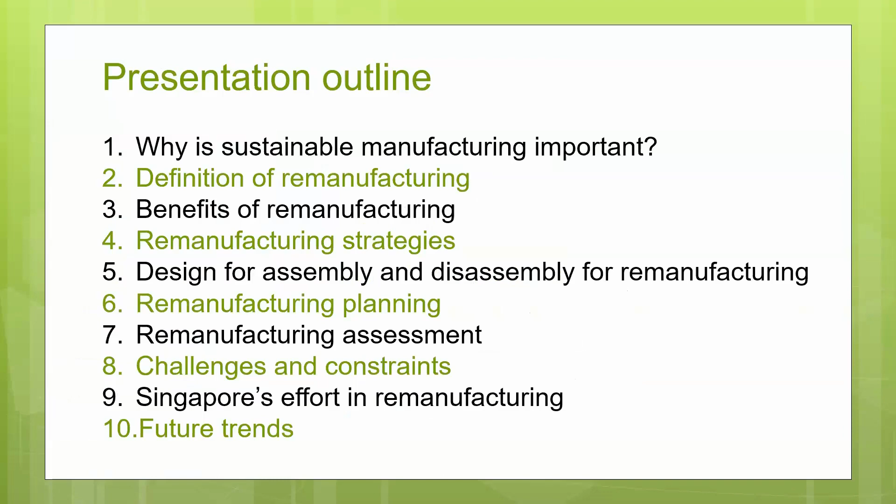A very quick definition: sustainable manufacturing and sustainable development is the development which meets the needs of current generations without compromising the ability of future generations to meet their own needs. But this is actually a very general definition. Everybody uses this. What it means is whatever we are doing now should not affect future generations.

We are producing a lot of discharge into the sea, discharge into the air, and so on. So whatever good production environment we are enjoying now, it does not mean that in future the same can be promised.

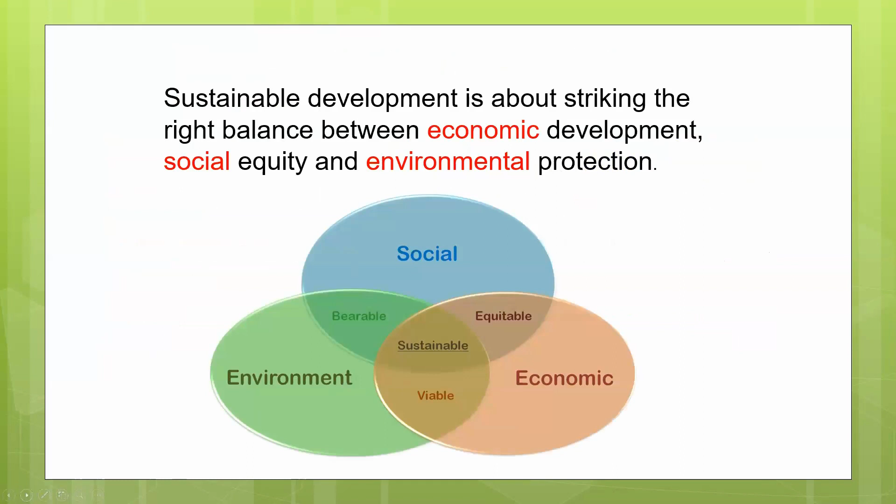I think this is again a very well understood diagram. It's a balance of three elements: social, economic, and environment. So this is a balance of all three, and if we can meet all of them, it will be a very good situation. These three elements, social, economic, and environment, are the three pillars, what we call the triple bottom line.

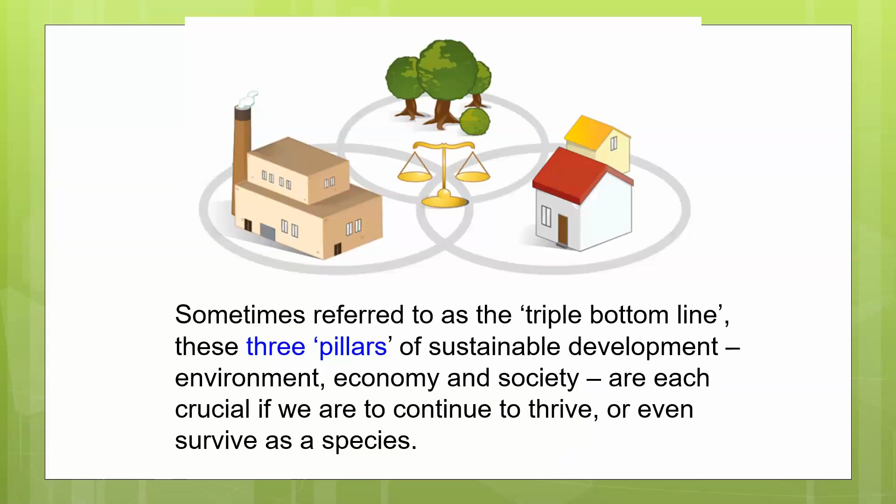I go through this very quickly, because we know the reason is water is a problem, and renewable energy is a problem. Now everybody is switching into wind, solar, and so on.

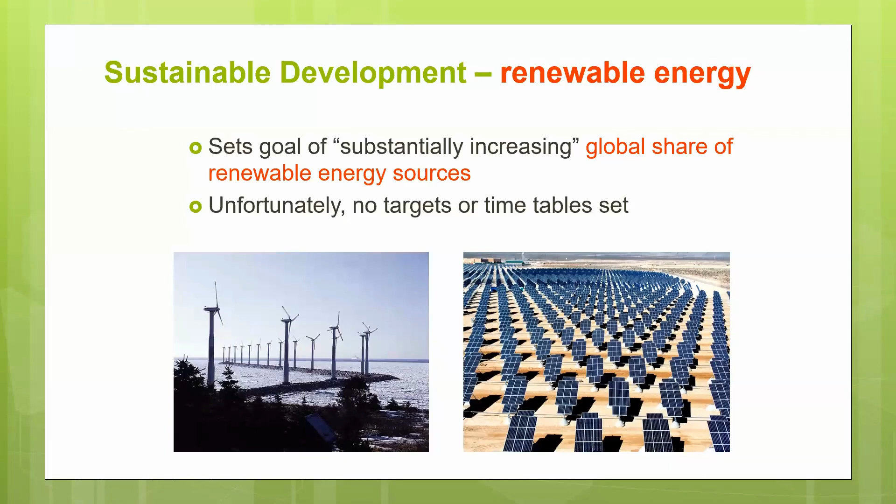In fact, I tell you honestly, the best energy is actually nuclear. Nuclear energy is the best, highly efficient, very clean, but safety is an issue. And of course we know that safety can actually be controlled. Now, the Fukushima accident actually is not due to the fault of the nuclear plant, but due to the earthquake, and the earthquake has resulted in the meltdown of the nuclear reactor.

And the Earth's resources are limited. And then we said that the world population is going higher and higher. We already heard the news: China used to lead the world's population, it has been overtaken by India.

I was even jokingly telling my friend, that's the only thing India can overtake China. I don't know about the rest, population wise. Yes they do, I'm not sure if I'm offending anybody here or not, you know, but that is a fact.

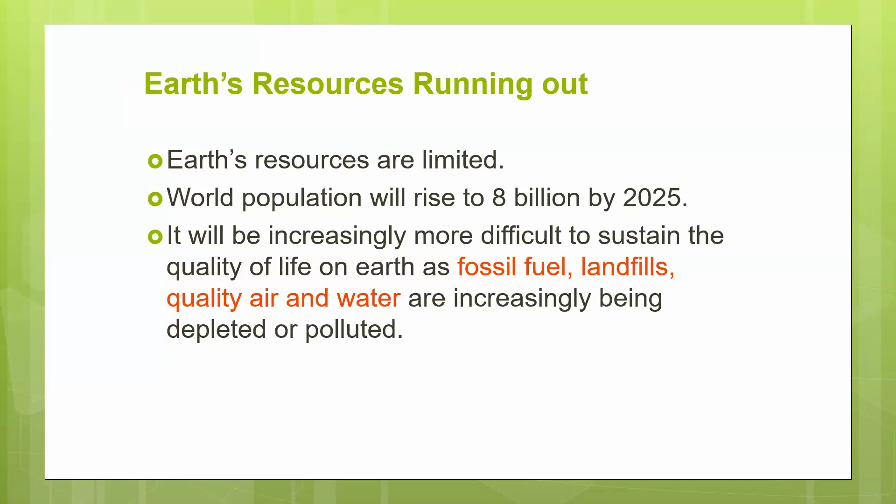You'll be surprised to see mountains of mobile phones. Now mobile phones, every few months you have a new model, so people just chuck it out and didn't think of trying to recycle the mobile phone, okay?

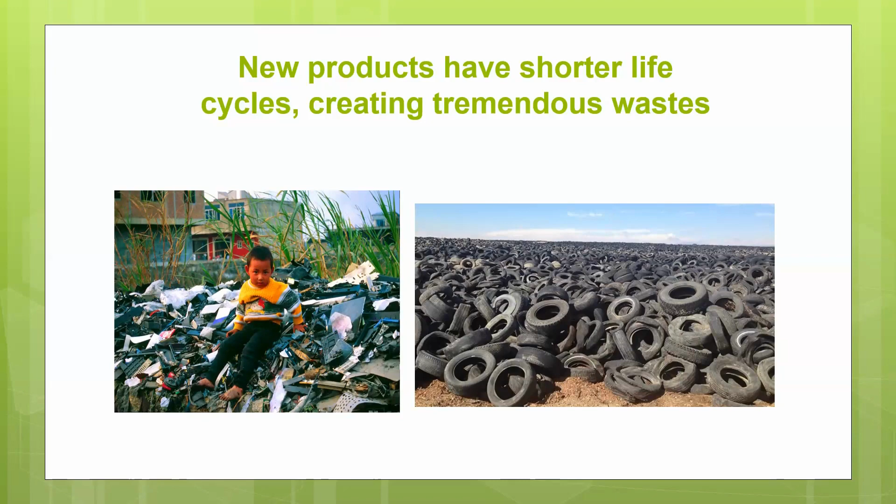And then other ways of treating it is, for example, you can landfill. But landfill, after a while, you run out of space. And landfill is not simply dumping waste into the earth or digging a hole. You have to have a lot of preparation to make sure that the leachate and so on are being properly collected, okay?

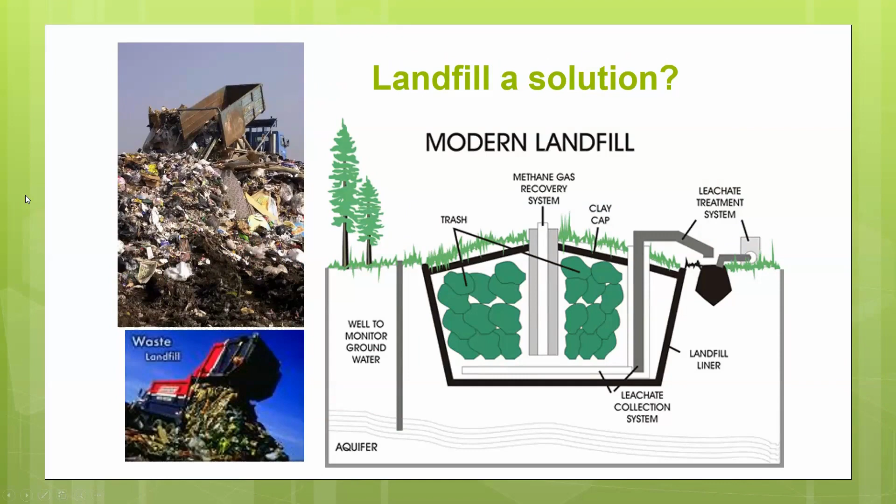And then increasing legislation, we have more legislation every day. So what is the viable solution? This one we all know: reduce the use of raw material. Reduce, this is called making it lighter yet just as strong, and that means you have to use a different kind of material, but the cost needs to be balanced.

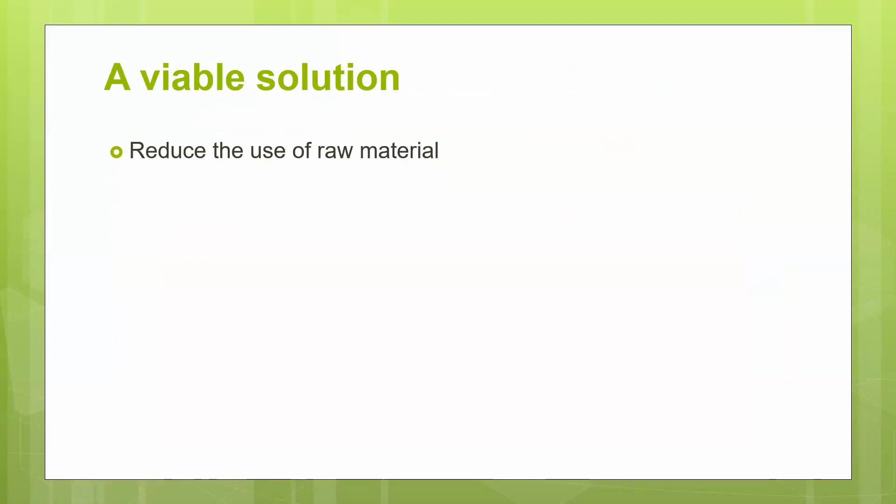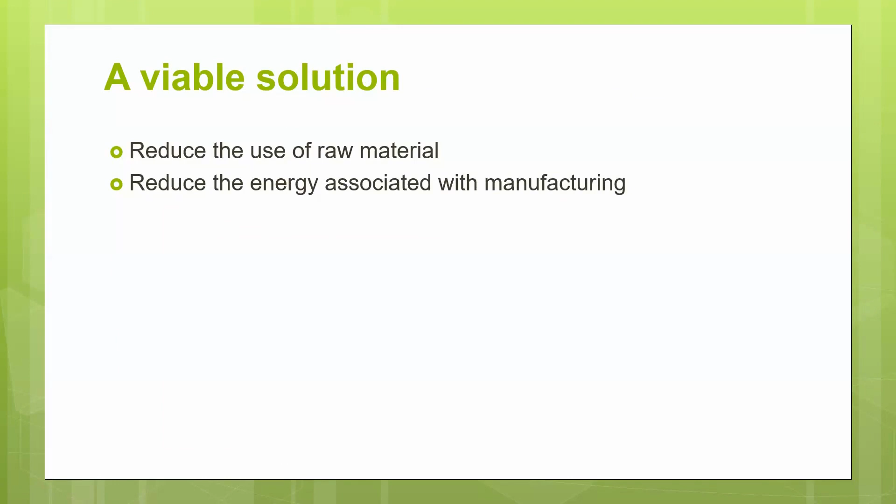Reduce the energy associated with manufacturing. We try to use a material that consumes a lower energy level, and is also easier to fabricate. Reduce pollution, reduce recycling. But my talk for this morning is not about those topics, because everybody knows these topics.

What I really want to talk about is remanufacturing. Now, remanufacturing, people get confused with a few terms like refurbishment, repair, demanufacturing. Now they are different things altogether.

Demanufacturing is actually you disassemble the complete thing and then try to recycle the materials and so on. That's demanufacturing. So at the end of the demanufacturing, you will not have a workable product.

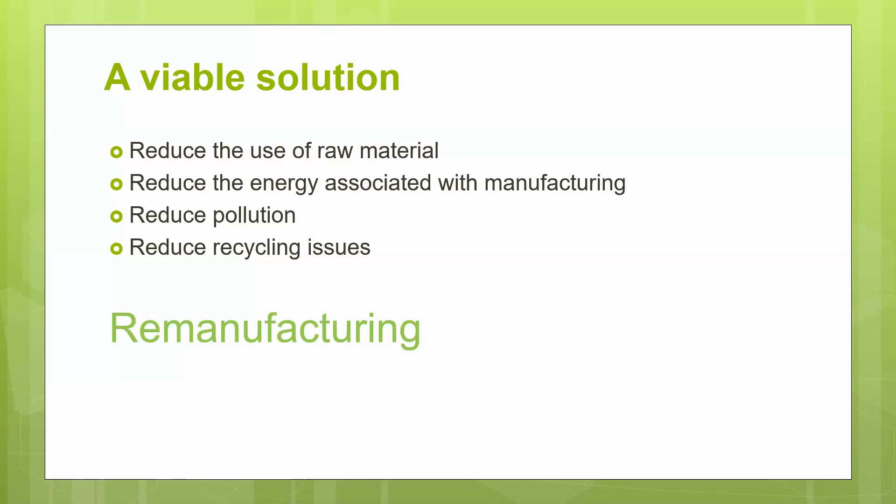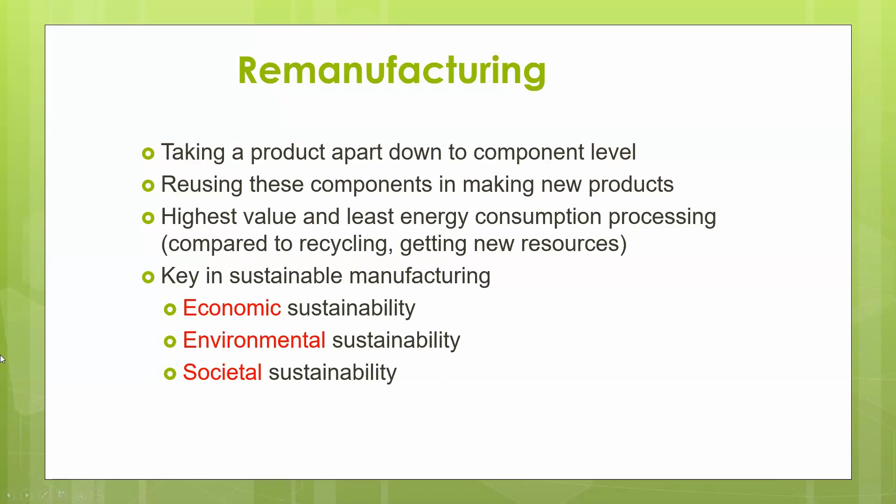But remanufacturing is you try to salvage the core component, we call it a core, and then you recondition it to bring it to the same working condition as before, and the product becomes a usable product. Remanufacturing is to take a part down to the component level, and then reuse the components, making new products. The highest value, least energy consumption processes are being considered, and this actually contributes to economic, environment, and also social sustainability.

Now, some of those parts that can be salvaged, these are what we call the cores. Core represents the most important part of a product, right? So if you can reinstate the condition of these cores and put it back again, you can actually reuse the entire thing. But the process is actually quite complicated. It consists of inspection, disassembly, part replacement, refurbishment, cleaning, and so on and so forth.

Now, very often people will ask, who would use a remanufactured product? Well, you'll be surprised, because if a remanufactured product is as good, almost as good as a new product, and you pay 30–40% less money, of course people want to use it. But there are a lot of pre-qualifiers. One is that the product must have a very long stable life, meaning it should still be in the market for the next 10–15 years. And also the product must have a pretty good high value to begin with.

Now, you don't remanufacture a calculator, or a watch, but cars, tractors, aircrafts, ships, and also military equipment. Military equipment actually is a very good candidate for remanufacturing, especially when a country is not preparing for war. They only use the equipment for practice, for training, and so on.

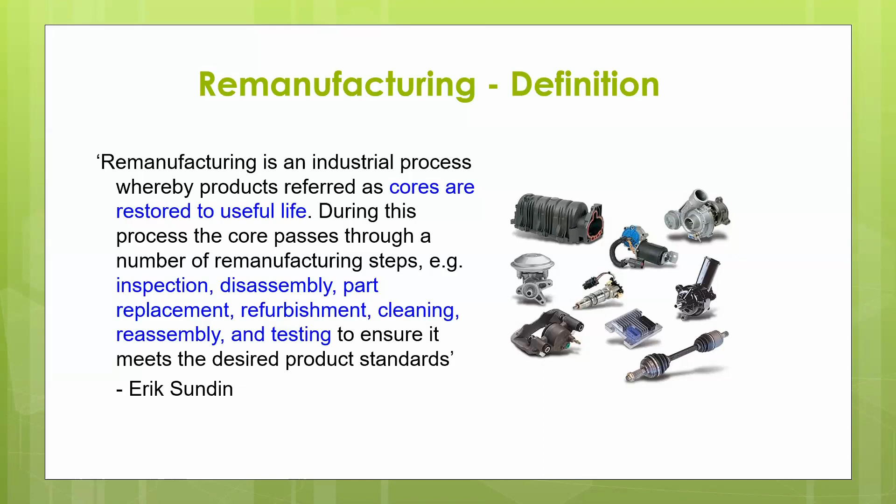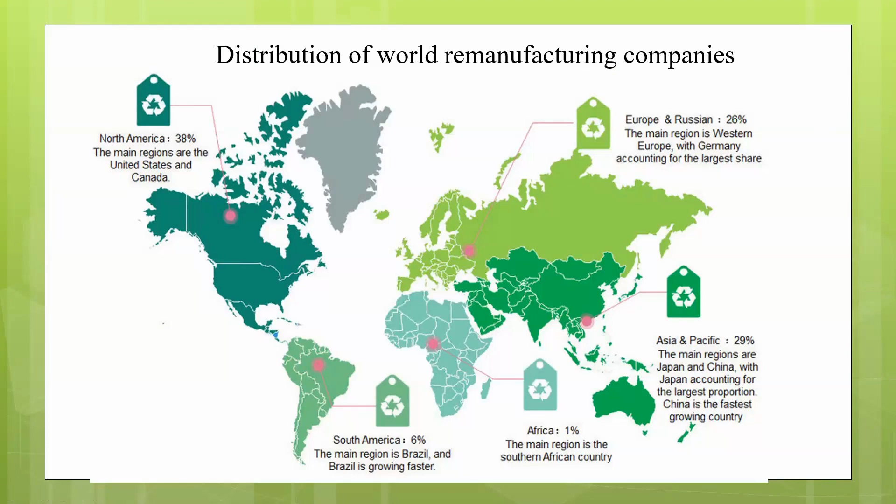So there are actually many countries that have practiced remanufacturing. For example, in Japan, this is sometime back, because nowadays nobody uses single-use cameras anymore — that's the film stage, right? But photocopiers, they remanufacture. In China, there's automotive remanufacturing, and Caterpillar's Earth Mover, Cummins, Volkswagen all established remanufacturing. In Singapore, we look at aircraft engine overhaul, crane, Caterpillar remanufacturing facilities, and so on.

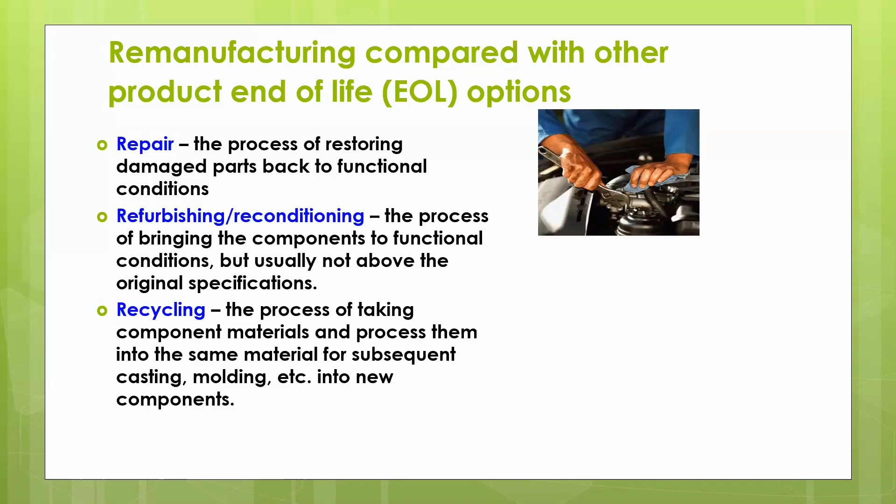Now, there are a few categories here. One is called repair. Repair is the process of restoring damaged parts back to functional condition. That's actually not remanufacturing, that's repair — when your car is not working, something's gone, you send the car in to repair, and the garage man puts it to work again. Refurbishing and reconditioning, again, this is not exactly remanufacturing. And recycle is the worst, because recycle essentially you strip and scrap the metal and then recycle the material, okay?

Now, for remanufactured products, you actually receive a warranty — could be 6 months, could be 1 year, and so on. And remanufactured products actually have very high levels of quality and performance, right? They may lose their identity — some parts that cannot be remanufactured are replaced with new components. But interestingly, a remanufactured product can outperform the original version.

Original version meaning the product that was produced, let's say, 10 years ago, and now you remanufacture it, it's actually better than the product 10 years ago. The reason is simple: it has been replaced by better components, better controls, and so on. But of course, it's probably not comparable to a brand new product made now, which has even more functions, electronic controls, etc. But then, of course, you pay much less. Whether you need a 100% functional product or you're happy with an 80%, 90%, 70% functional product, and yet pay a much higher discount for it, okay?

For example, like a vacuum cleaner — I wouldn't buy a Dyson vacuum cleaner. I mean, it's efficient, no doubt, but it's crazily expensive. I would buy a vacuum cleaner which is much cheaper, and at the most, I sweep my floor a few more times, right? Dyson can do it in 1 time, I can do it in 3 times. But the thing is, would you pay for a remanufactured Dyson vacuum cleaner at 50% of the price? Some people may consider that.

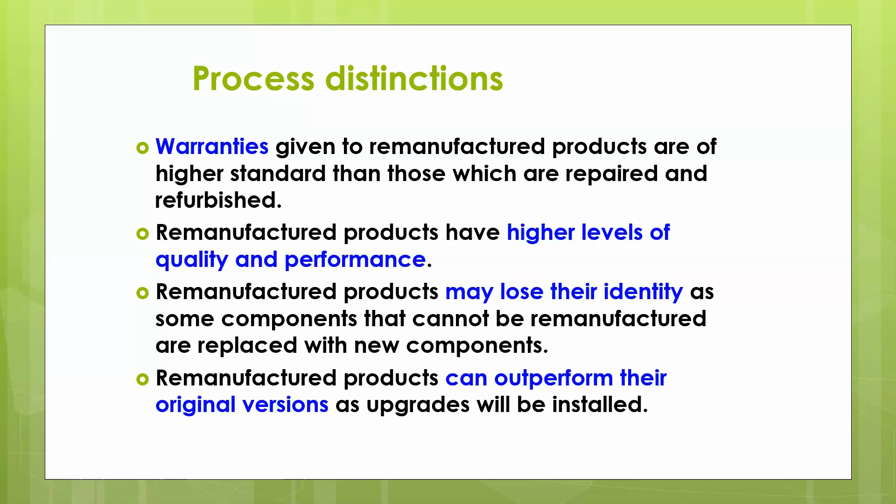Now, remanufacturing, let me put it in the right perspective. It's different from the manufacturing of a new product. Manufacturing of a new product is more straightforward — you know exactly the assembly procedure, the sequence, how to put it together, how to test it, and so on. A remanufactured product — just imagine you receive a product, it could be a car engine, which is already 10 years old.

When a product comes in, usually it's greasy, dirty, and some parts may have been corroded. So the first thing you have to do is clean it up and decide what can be salvaged, what cannot, and how to disassemble it.

Disassembly becomes a very key point in remanufacturing. In fact, I tell students, if you design a product that's extremely difficult to disassemble, it cannot be considered for remanufacturing. Sometimes you have to break a few parts to take them apart, and that's also not friendly for remanufacturing at all.

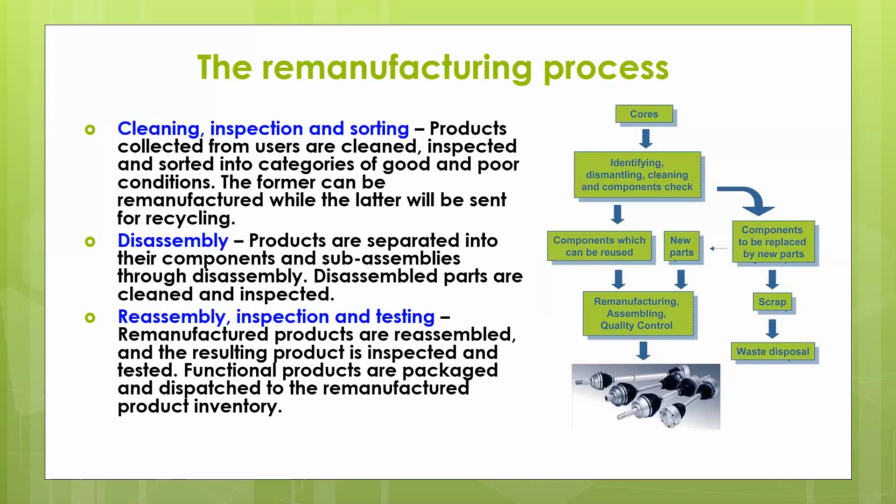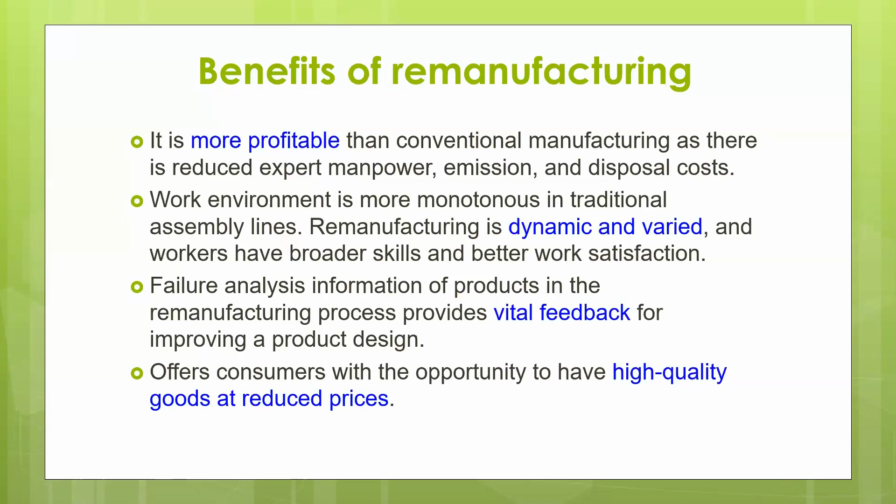It uses less energy and raw materials because essentially the material is already there in the product. You don't have to cast the engine again. All you need to do is refurbish some of the cylinders and pistons and so on.

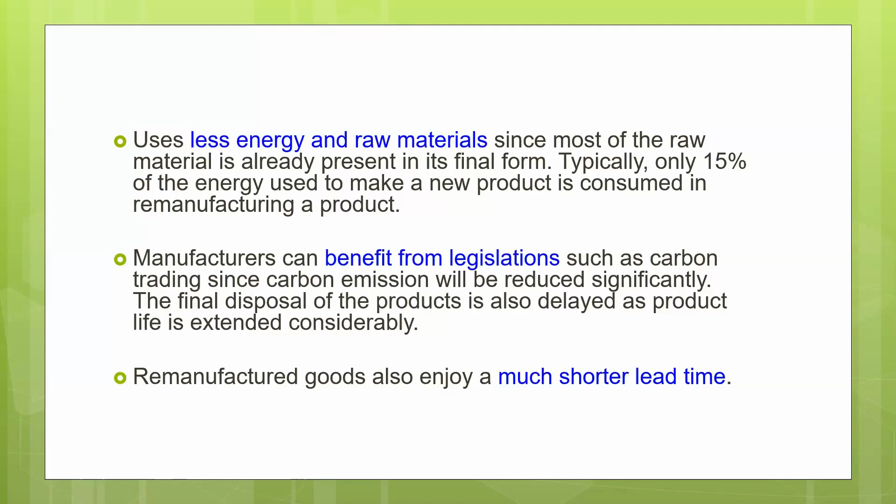Manufacturers can also benefit from legislation, such as carbon trading and carbon emissions will be reduced. Later on we'll talk about the carbon footprint effect. So remanufactured goods can actually enjoy a much shorter lead time.

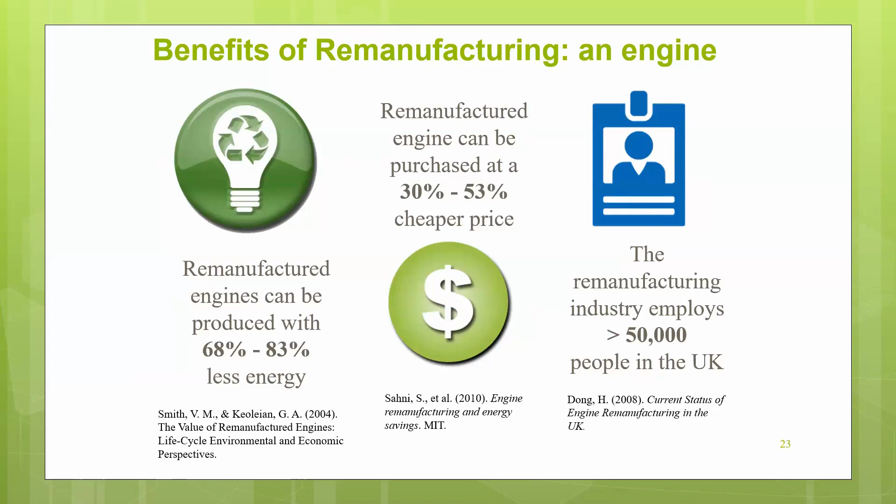If we look at this summary, remanufactured engines can reduce energy use by 68 to 83%, and can be purchased at a 30 to 53% cheaper price. Also, the remanufacturing industry has created a lot of jobs in the UK and elsewhere, employing over 50,000 people at that time, and now likely a lot more.

So why remanufacture? If you look at a new product, you have a few components: the material component, the labor component, energy, and also plant and equipment. A remanufactured product can preserve quite a lot of that material, almost all of it, and the energy previously spent can now be preserved.

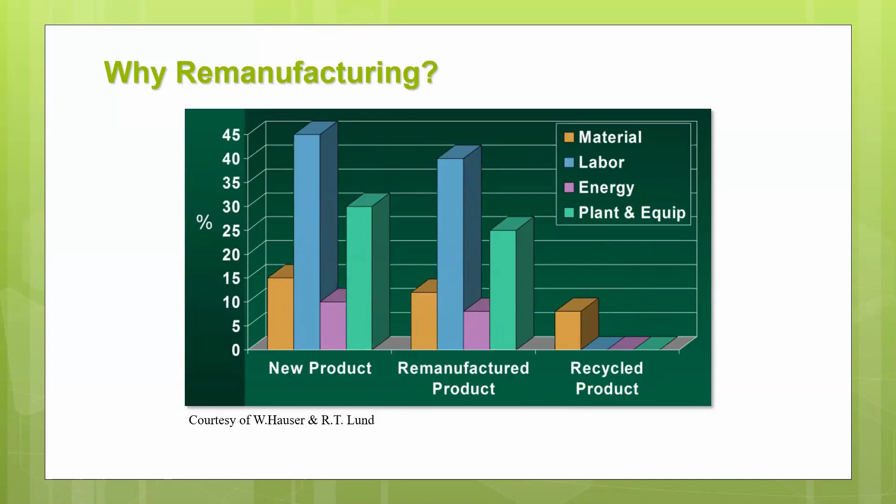Compared to a recycled product, you can only recycle some of the materials; all the rest unfortunately disappears. Once you burn down, disassemble, or recycle an engine, of course the labor originally used to build the engine is all gone.

Now, what are the general qualifiers needed for remanufacturing? Firstly, you must have a long and useful life, and stable technology. It should not be displaced by disruptive technology.

Disruptive technology can actually be quite frightening. It's a new technology that comes in initially like replacing an old technology, but at the end it completely wipes out the old technology. Frightening. For example, calculators have been wiped out by mobile phones - every mobile phone has a calculator built in.

And then going back again, the typewriter - who used a typewriter? I don't think any of you has used one before. In our days, we all typed our thesis reports using typewriters, but that's long been replaced by computers. And analog watches have mostly disappeared, replaced by digital watches.

Except for the very expensive high-end watches, like Patek Philippe and Vacheron Constantin - those are still analog. The reason is people pay for the craftsmanship, the precision, not just an electronic circuit inside a watch. I would not pay $100,000 for a watch if it's electronic. I would go for a manual, classic Swiss assembled watch. You pay for that.

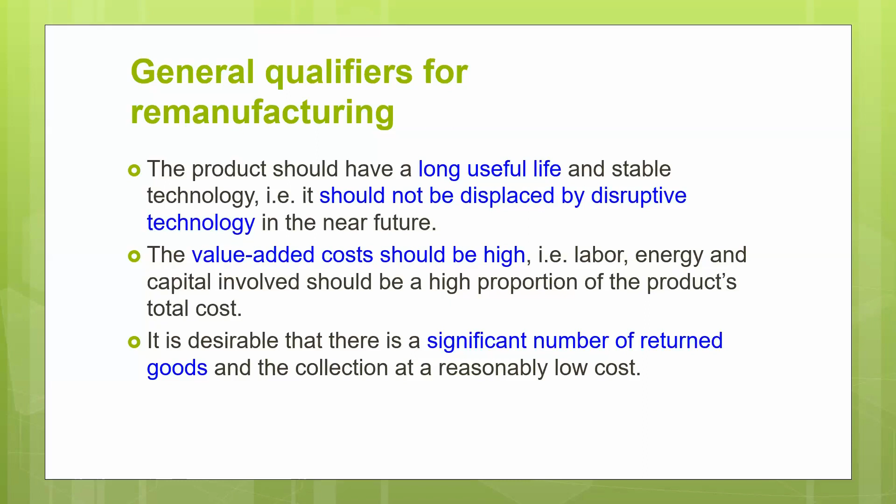You need a distributed network of transportation, workshops, and special training sections. A lot of workers who work on the production line and also in the remanufacturing plant have been interviewed, and remanufacturing is more exciting. I can tell you 100% of the workers will say remanufacturing is a lot more exciting - on the production line, you're working like a robot.

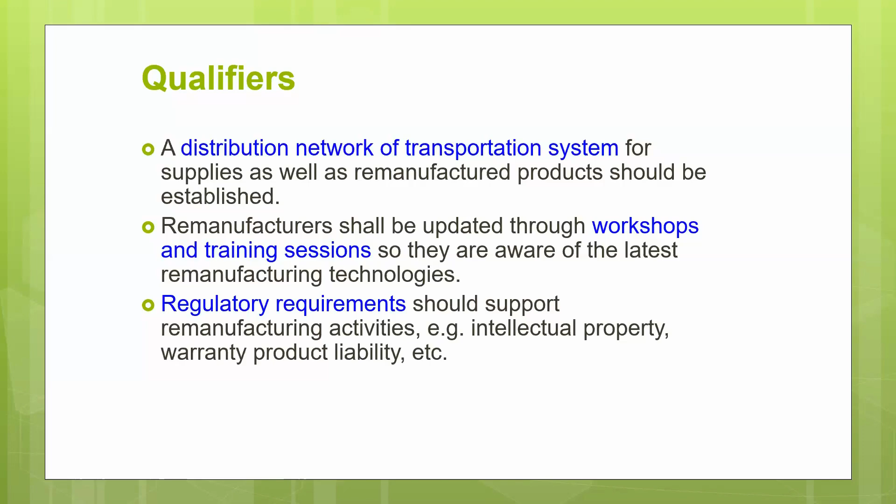All the sequences are fixed beforehand in mass production. That's nothing exciting - every day you just put things together, test it and so on. But remanufacturing is different. When a product comes in, you first have to look at it, see what's wrong with it, then figure out how to take it apart, how to clean it, and how to put it together. Every case is different. That's where the excitement is - you don't want to do the same things over and over, you want to look at individual new cases.

Of course, not all companies would like to consider remanufacturing. In fact, the best people to do remanufacturing are the OEMs themselves - original equipment manufacturers. The reason OEMs are best is because they have all the parts, all the tools, and they know the sequence used for the new product, which they can apply to the used product. That is the best approach.

But a lot of OEMs don't want to do it because they feel they'd be producing two types of equipment - new and remanufactured - and this can cause confusion for a buyer about whether they're buying new equipment or remanufactured equipment. The companies have to be very clear about this - they have to stamp it on the certificate and tell you that this is actually a remanufactured product.

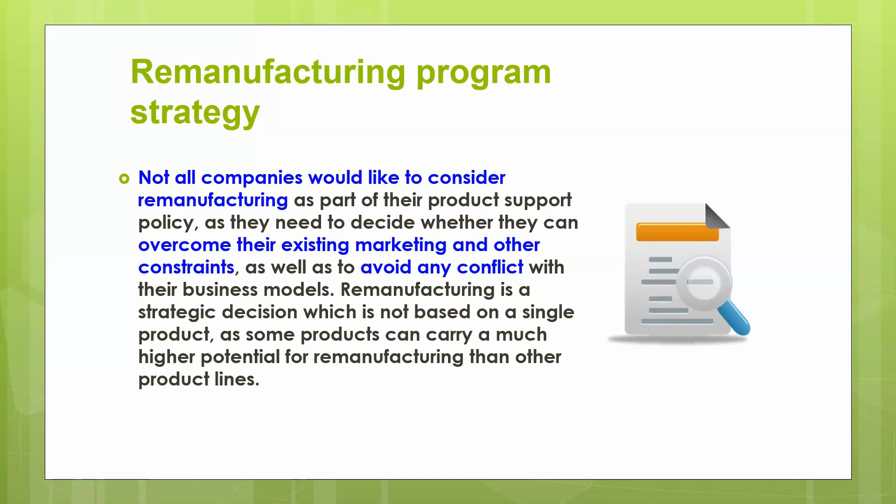This is the kind of work we did at the university. We came up with a plan starting from design for remanufacture, and then looked into how we service, monitor, and examine the remanufacturing facilities, and then studied the cost and inventory management, and the remanufacture assessment.

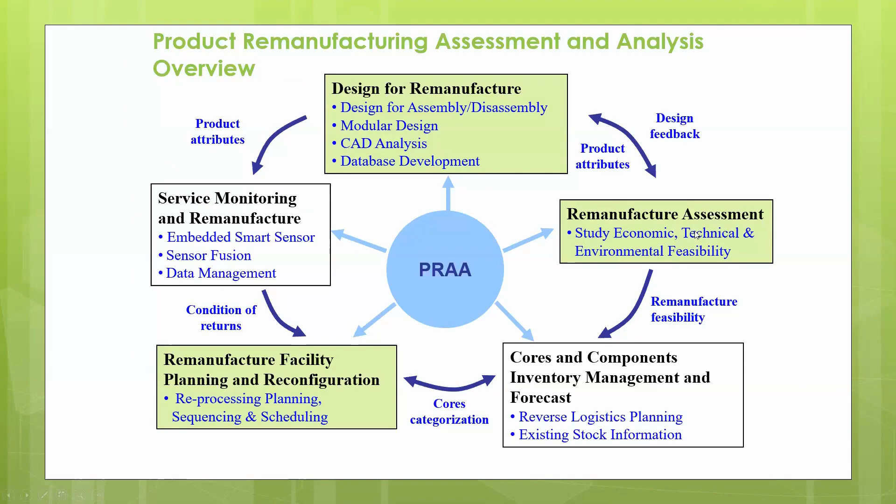This is kind of the talk outline. We can start out with CAD analysis and database development. Here we start with a CAD model, extract all the features, bill of materials, fastening, joining, etc., and then come up with an assembly model.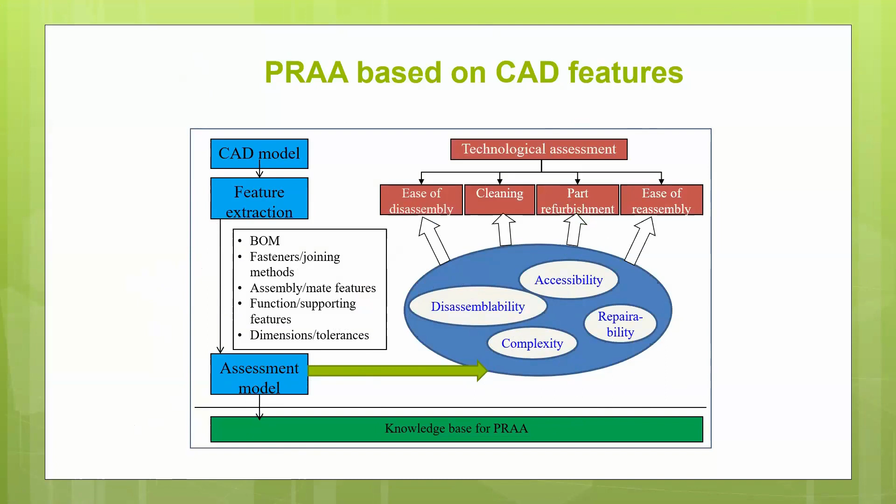We look into disassembly, accessibility, repairability, complexity, and so on, and then come up with an overall plan for the remanufactured product. There are a lot of approaches and mathematical tools that can be used - some of them like HGPR, hierarchical graph representation, and also assessment metrics and similarity functions, etc.

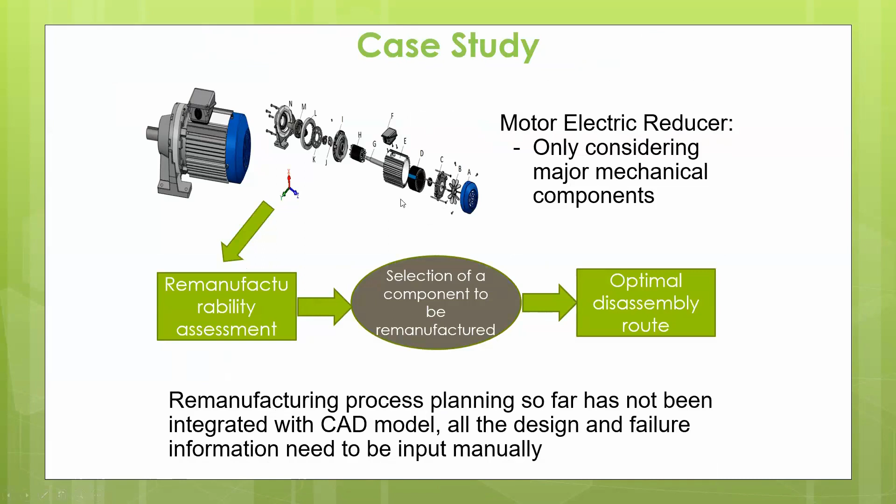This is kind of output from the program we designed. An example we use is an electric reducer. We consider how this is taken apart, which parts cannot be reused, and where the core is - the core represents the most important part of the product.

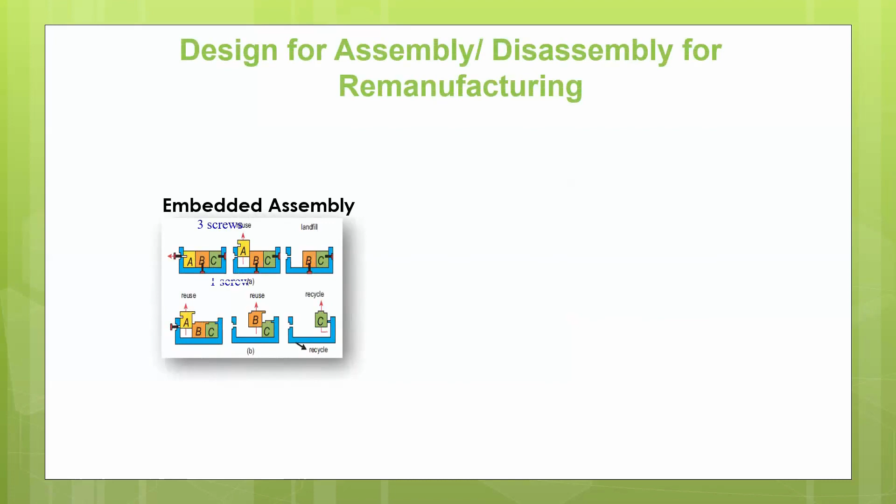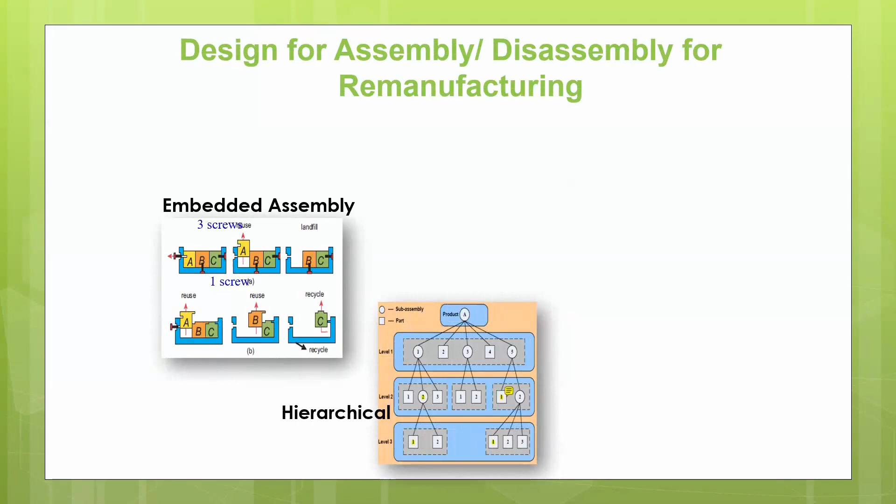There are a couple of different approaches. One is called design for embedded assembly and hierarchical disassembly - there are different levels, meaning when one part is done, you move to the next part, and so on. Then there's modular and active disassembly.

Modular is actually one of the best approaches - you can take it apart easily using modules. For active disassembly, there's the idea that if you apply current or temperature, the part can return to its original state using memory alloy and so on. In other words, when an engine comes in, you apply some kind of activation and the parts slowly disassemble by themselves.

Now, this actually sounds kind of like a fairy tale story - it doesn't work that way, it's not so straightforward. Maybe for certain elements you can do that, but definitely not for an entire engine where you pass electric current through it and everything disassembles by itself.

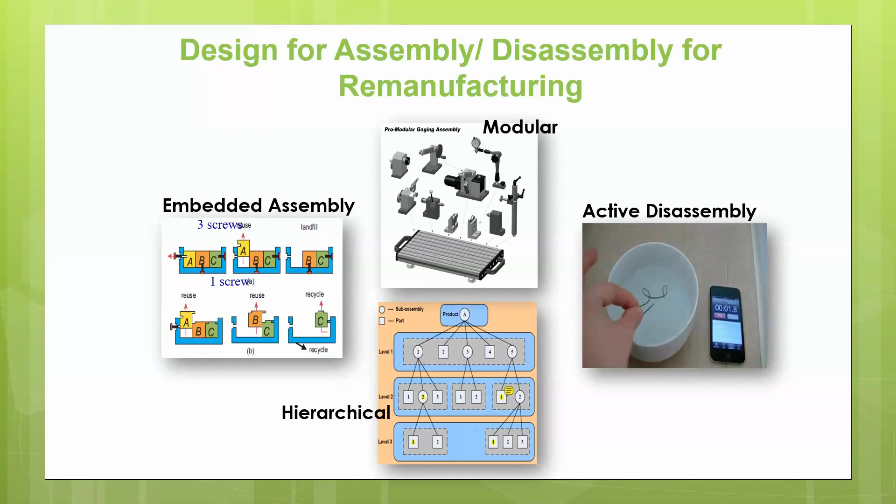This can also be dangerous. Can you imagine driving a car, and suddenly you go through some high energy current field, and you find that all the parts of your car are on the road - it has been fully disassembled? It's not going to work that way, okay?

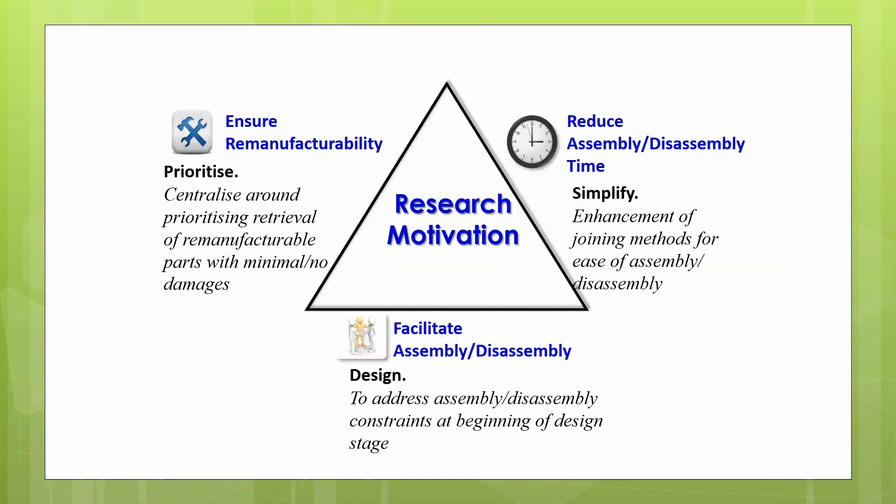Research motivation, number one: ensure remanufacturability, reduce assembly and disassembly time. This is the part we look at for the engine to decide the various factors.

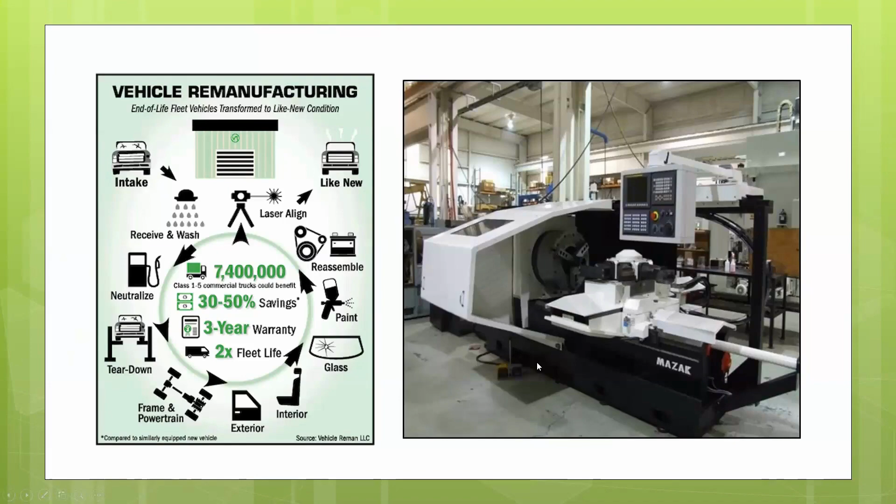Typically for vehicle remanufacturing, there are certain considerations. This is actually another big area - remanufacturing of machine tools. Many machine tools can actually be used for a long time. All you need to do is service the spindle, service the controller, and then the slideway and so on.

This is actually quite involved - I'll go through it quickly. There are certain parts to take note of when considering remanufacturing.

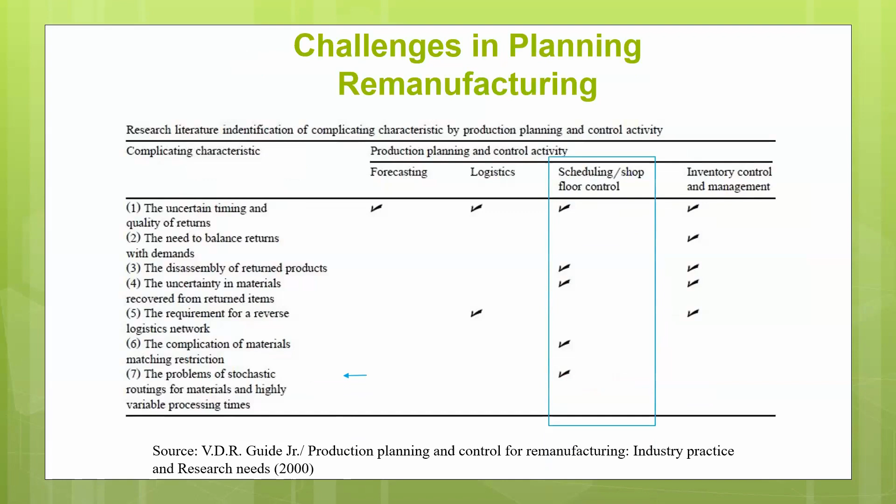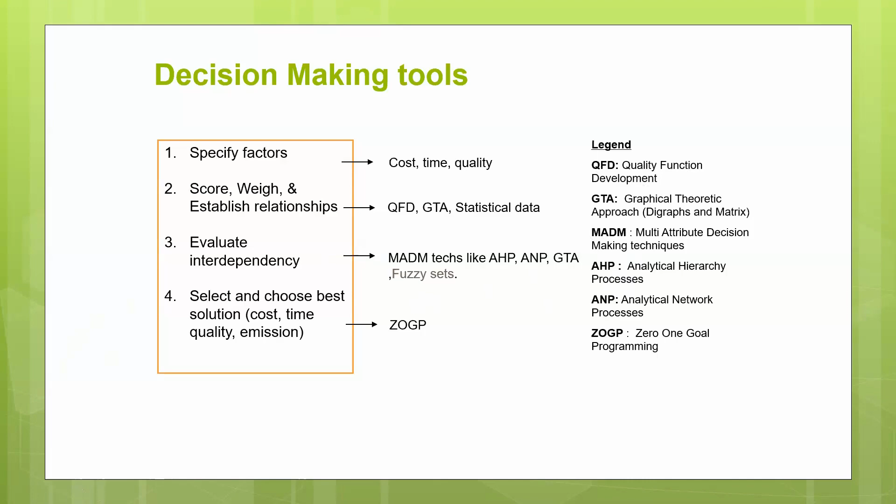There are lots of decision-making tools. As Dean Mann already mentioned earlier on, remanufacturing is not a single disciplinary kind of activity. It involves a lot of other considerations. For example, we have to look into QFD, GTA, AHP, and so on and so forth. There are many tools that can be used for remanufacturing, because these tools are more on the side of industrial engineering than mechanical engineering.

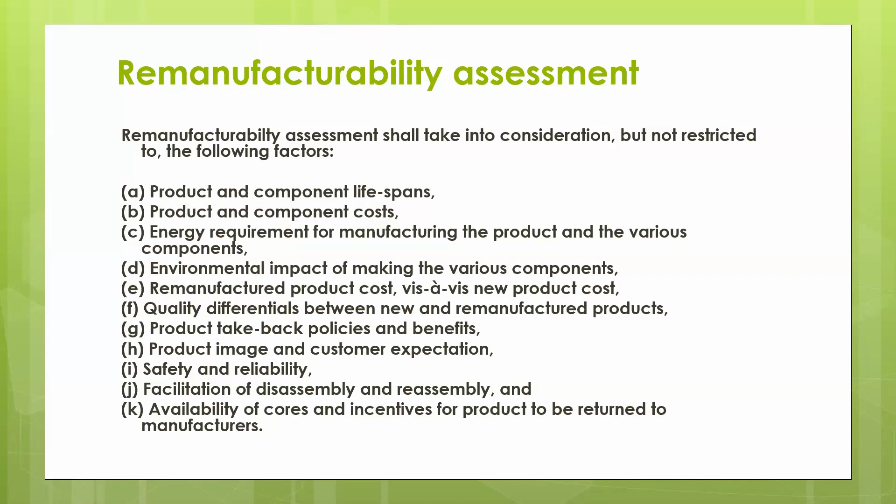Remanufacturability assessment, again, there are quite a number of them. As I mentioned earlier on, it must have a good lifespan. In other words, the product must last a good number of years. And then also you look into the environmental impact and other issues.

Now, not all factors can be equated on a similar basis. This is a little bit difficult. So we actually came up with an item called remanufacturability index, using this index to assess whether a product can be remanufactured easily or not.

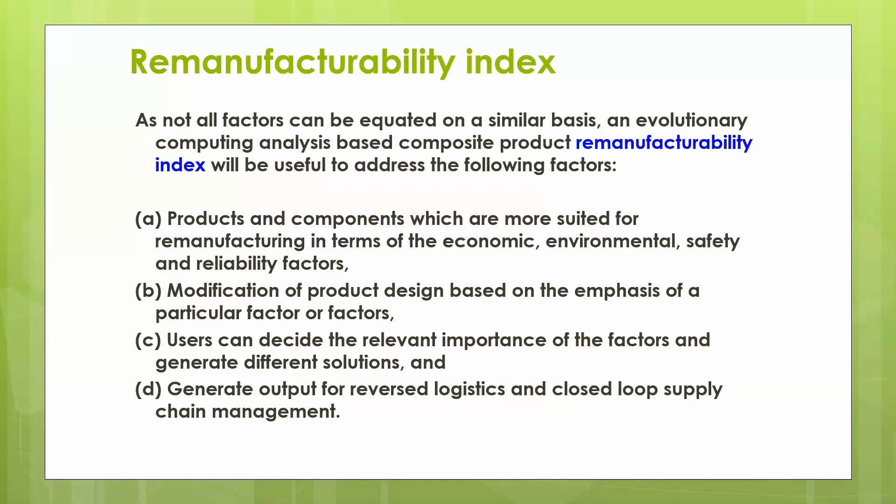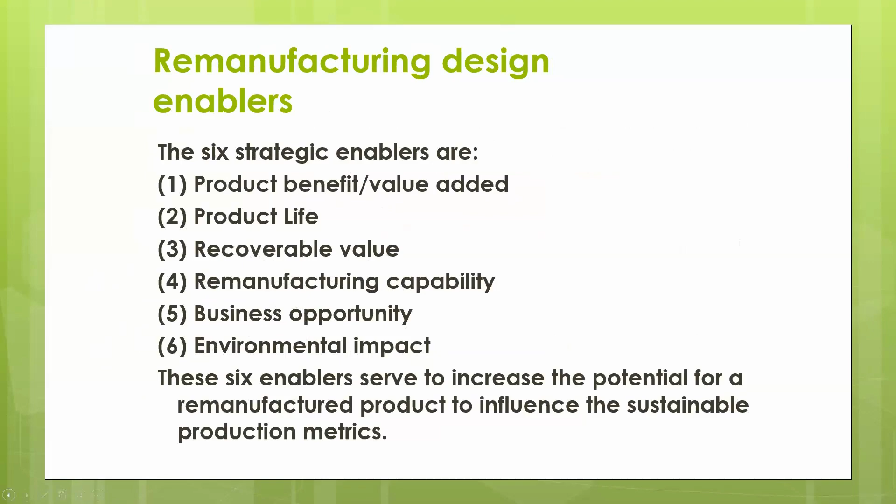Now, six strategic enablers are: what is the product value, benefit added? What is the product life? Recoverable value, remanufacturing capabilities, what are the business opportunities, and environmental impact. Now all of them need to be analyzed before you can come up with a viable solution.

And a significant reduction in environmental impact can be made. That is actually quite a major contribution of remanufacturing. And also it's rather difficult, because I'll tell you what are the most difficult parts.

You have to collect used cores from products. Now, it's very hard to predict when those used cores will come in, and at what frequency. So this becomes a very difficult thing to forecast. And because different equipment which has been used in the field, some could last much longer, some would only last a very short time, it's difficult to do forecasting.

So therefore, the inventory is actually a big challenge. How do you prepare that inventory? How do you prepare the inventory to meet the remanufacturing demand?

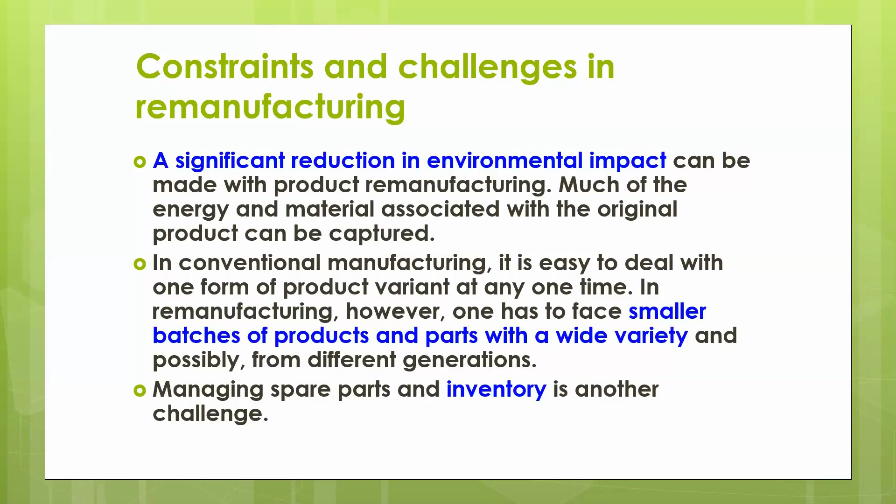And to make it more complex, there are many, many versions. I mean, just look at a car. Every 3-4 years, they come up with a new model, and a new model would have different parts and so on. So that becomes a mixture. You have to identify whether this car is 2005 or 2010, and then match it with different components and different kinds of facilities and so on.

The fastening actually is a very major concern. A lot of parts are welded, and those parts cannot be dismantled without cutting it out. So we should not design welded parts or use adhesive to fix the parts together. This is one way for design for remanufacturing.

In fact, I was telling the students, nowadays a lot of parts are actually fixed together using snap fit. Now, snap fit sounds very easy - you just put it together, you hear a click, they're fixed together. But how do you unclick it is very difficult. It's not easy. Either you have to use a special tool, or you may even have to damage the click joint before you can even dismantle it.

And then I taught the module called Design for Sustainable Manufacturing and Product Fabrication. This particular module actually asks the student to pick an actual product, whether it's a vacuum cleaner, an oven, a stove, and so on and so forth. And then they have to analyze it using software called Eco 99 or other software, to analyze the kind of materials and then look at the final carbon footprint and decide what to replace and how to improve.

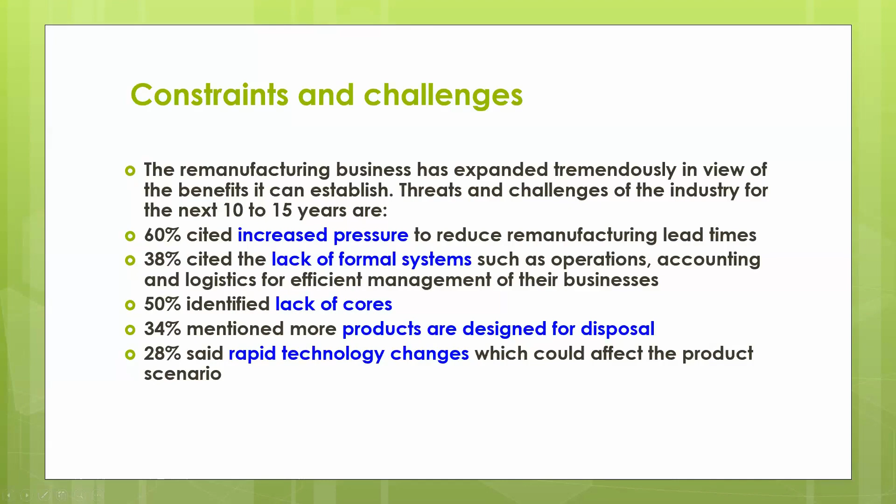Cores means the most important part. You don't have the cores, you cannot collect enough cores, it's very difficult to carry out the remanufacturing. Products are designed for disposal, then there's no point to remanufacture. And also technology changes are very fast. So considering all these points, not many products are suitable for remanufacturing.

So you must decide which are the products you want to handle, okay? And then you also need a different mindset, and there's a shortage of skilled labor.

Now this actually becomes very skilled labor. Imagine this, we are back to like a job shop situation. A job shop worker is actually a very skilled worker because he has to handle almost all the different operations. It's not like a flow shop, where each one is looking into a certain part and not bothered with the parts before or after. A job shop worker is very skillful, and this kind of labor is very hard to find.

And then very often there's no good correlation between the supply of return products and demand for remanufactured products, okay?

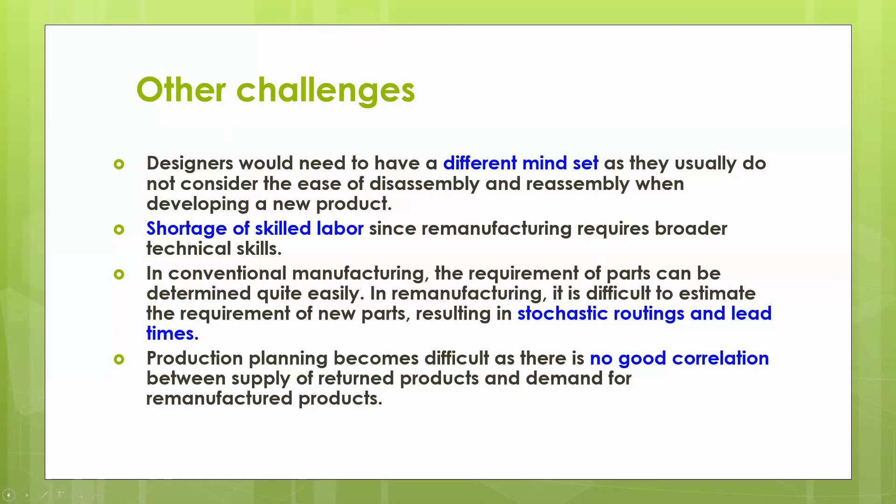Here again I summarize a few points, which I won't go through all of them. What I normally use to describe remanufacturing in two words, we call it SS, sporadic and stochastic. This is how it describes the remanufacturing process. It's sporadic and it's stochastic, very hard to forecast, very hard to predict.

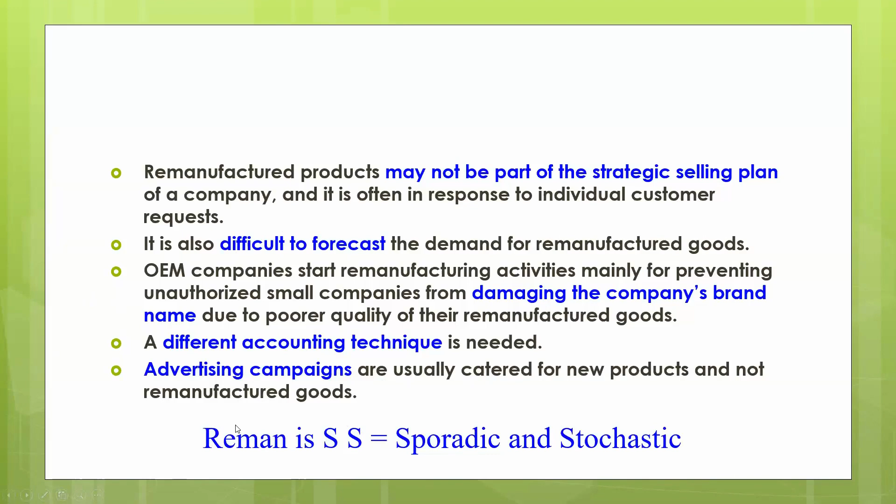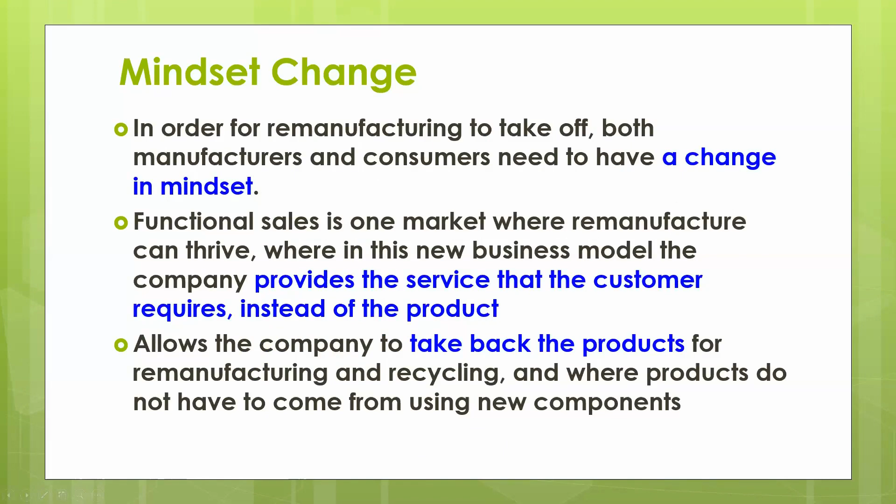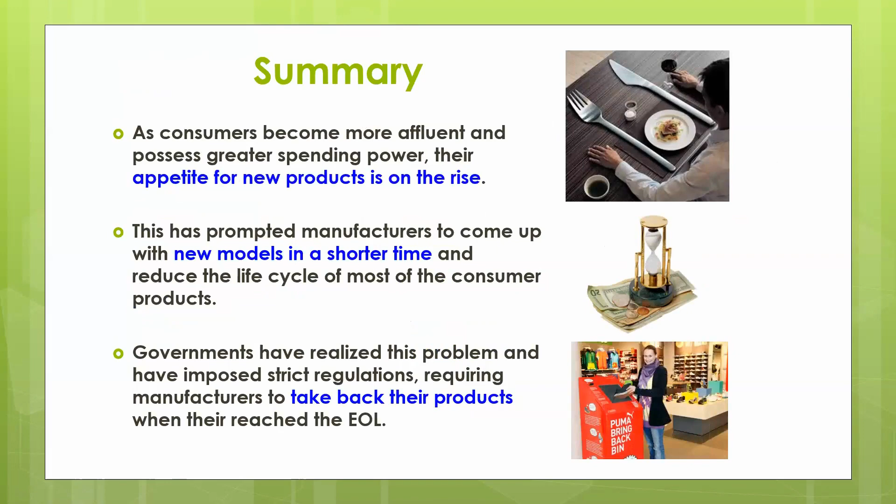Changing your mindset is very important, and then provide the service the customer requires, and also allow the company to take back the products. As consumers become more affluent and possess greater spending power, they want new products and new models in a very short time, and also take back products so you can remanufacture. This is most environmentally friendly, and remanufactured parts can provide excellent performance. The remanufacturing industry has actually supported a lot of research activities.

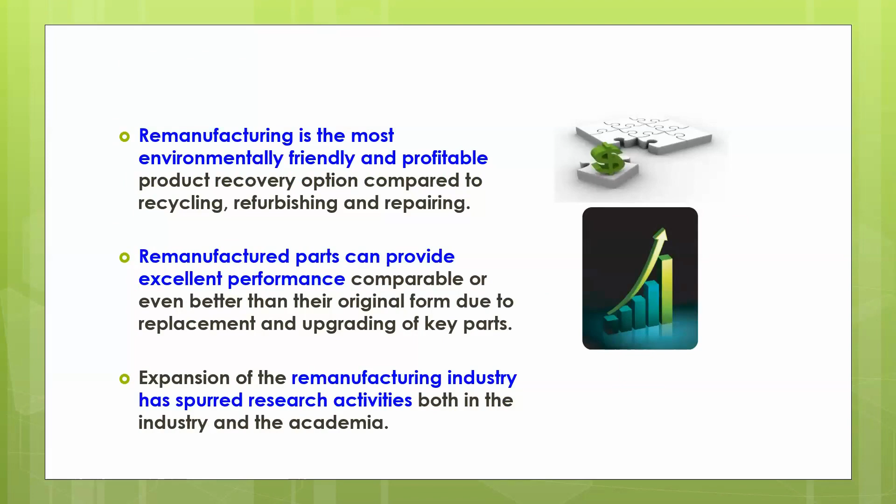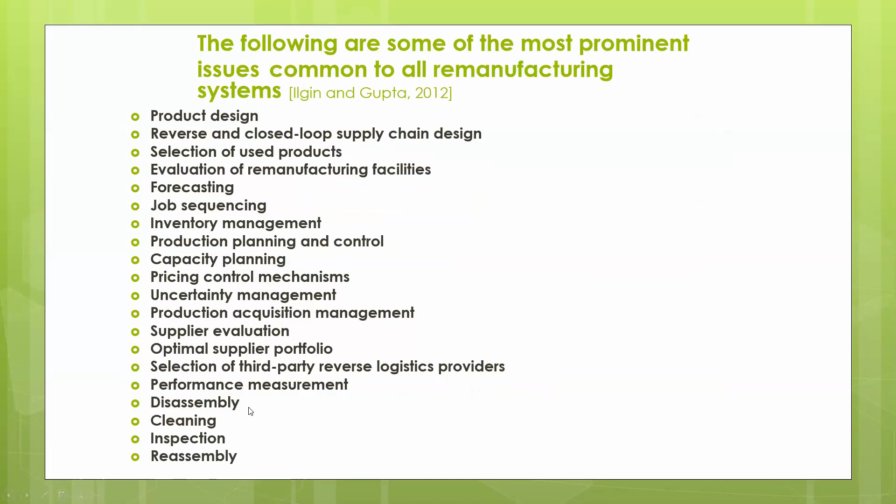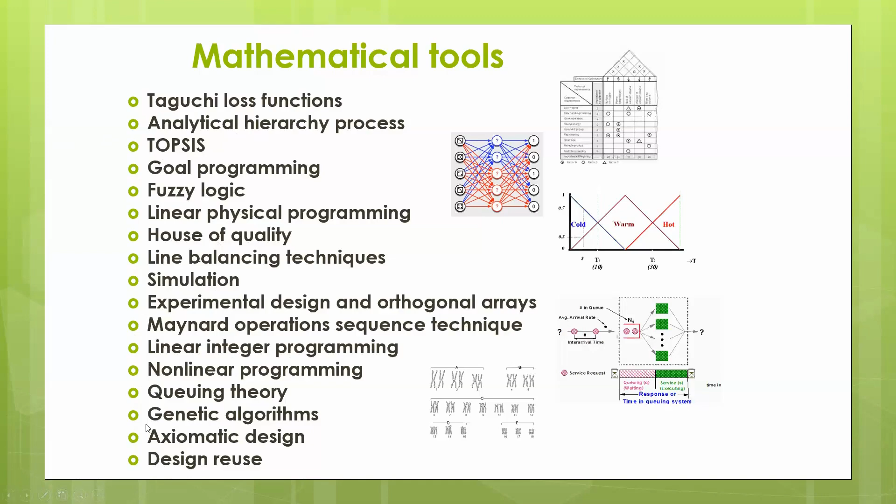I'm not going to go through all of them, but this shows what are the necessary actions required from product design all the way to reassembly, inspection, etc. And what are the mathematical tools taken? It's lots and lots of mathematical tools: Taguchi, TOPSIS, fuzzy logic, house of quality, linear integer programming, queuing theory, design for reuse, axiomatic design, and so on.

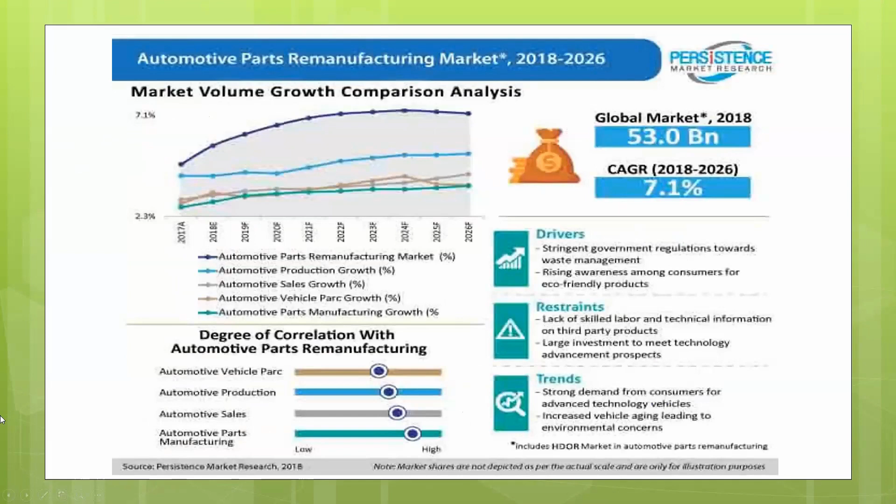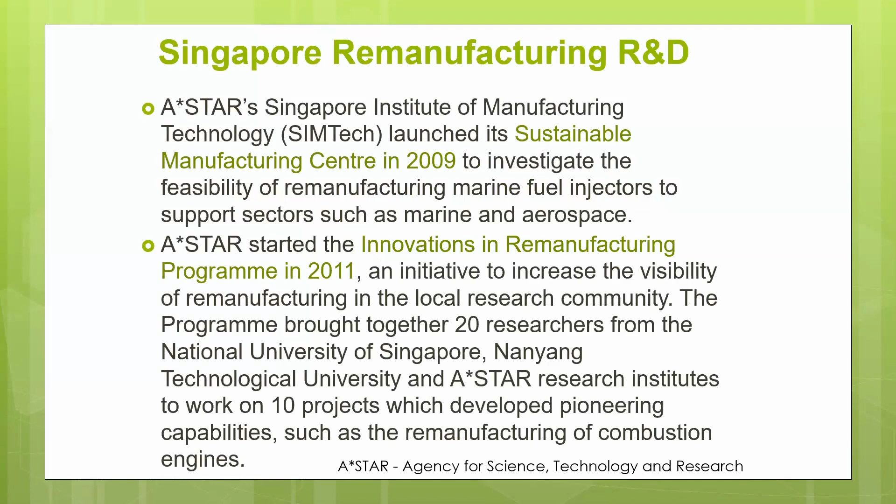Very quickly, I show you some slides of Singapore's R&D effort in remanufacturing, A*STAR, Singapore's Institute. They started this remanufacturing project about 12 years ago, put in a lot of funding support, and built up a very good line for handling remanufacturing.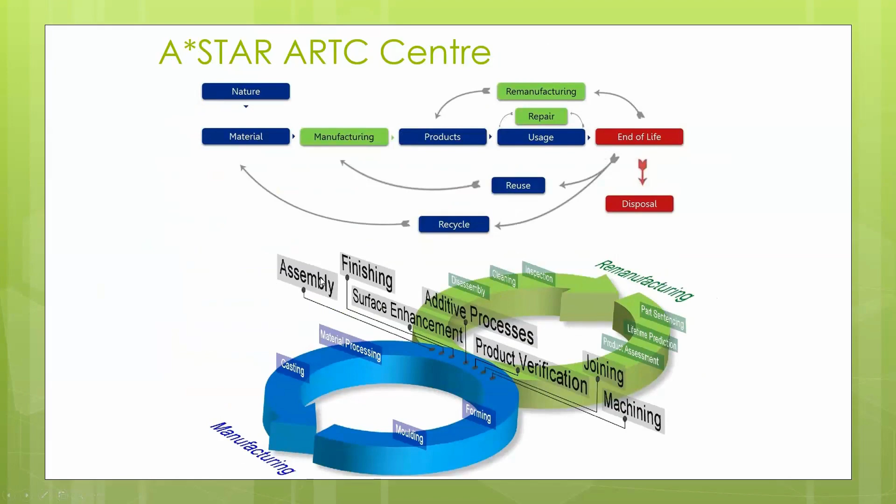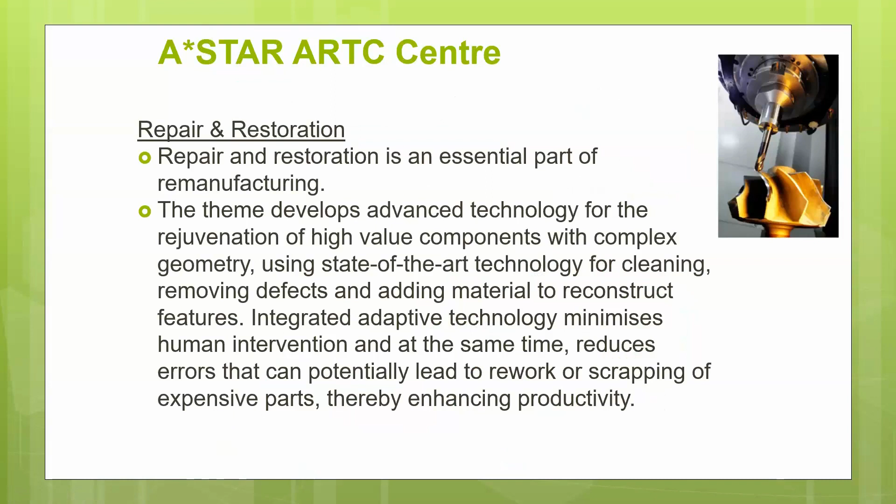It involves assembly, finishing, using 3D printing to do repair, like laser cladding, surface enhancement, product verification, machining, and so on. Repair and restoration is one of the major parts. Areas of focus include performing cleaning, minimum use of chemicals, removing defects, and using additive techniques for part regeneration and repair. This is where the additive repair of aerospace parts is carried out.

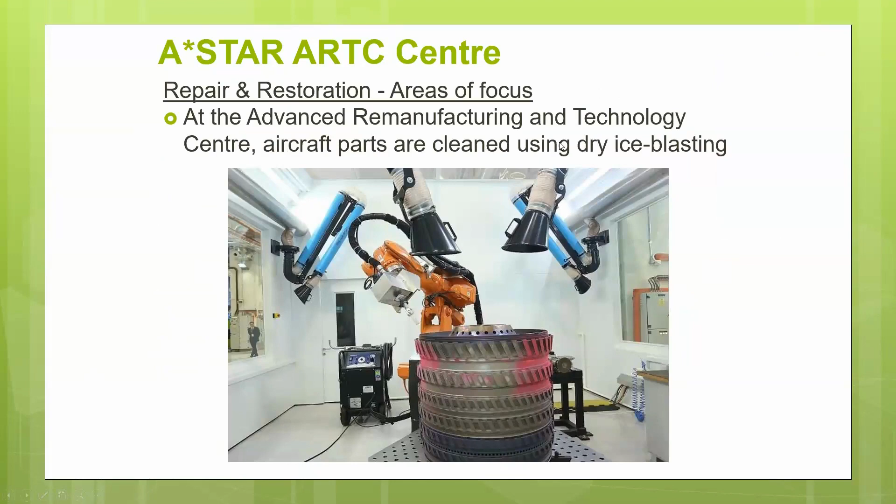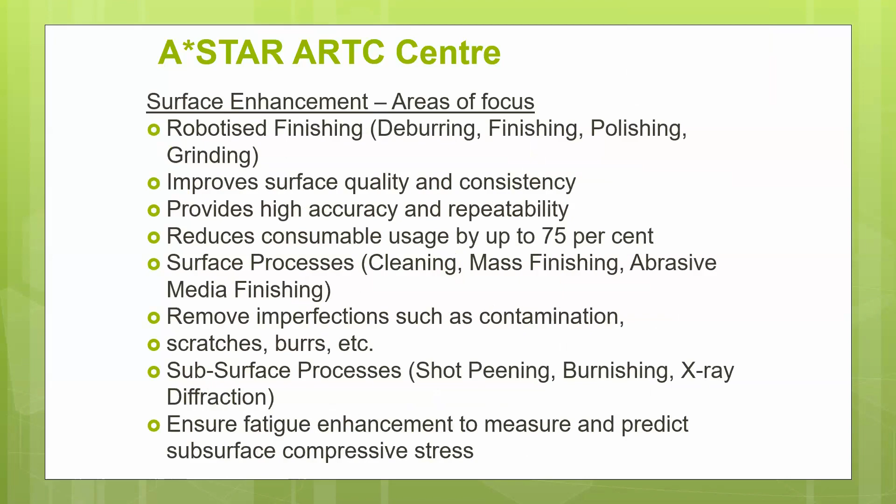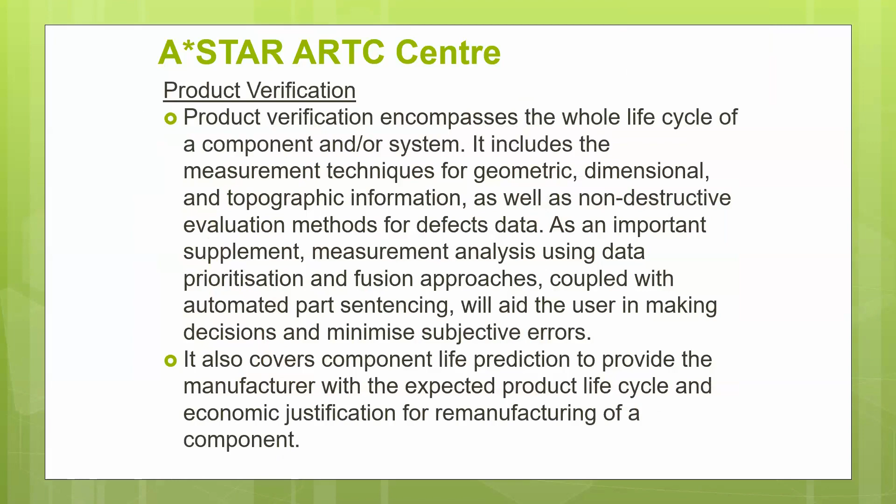Surface enhancement, and again, to make the surface treatment, some additional techniques like shot peening, burnishing, etc. Surface enhancement, then measurement and testing, and then product verification. So after that I need to verify products. There are lots of focuses here, which I'm not going to go through.

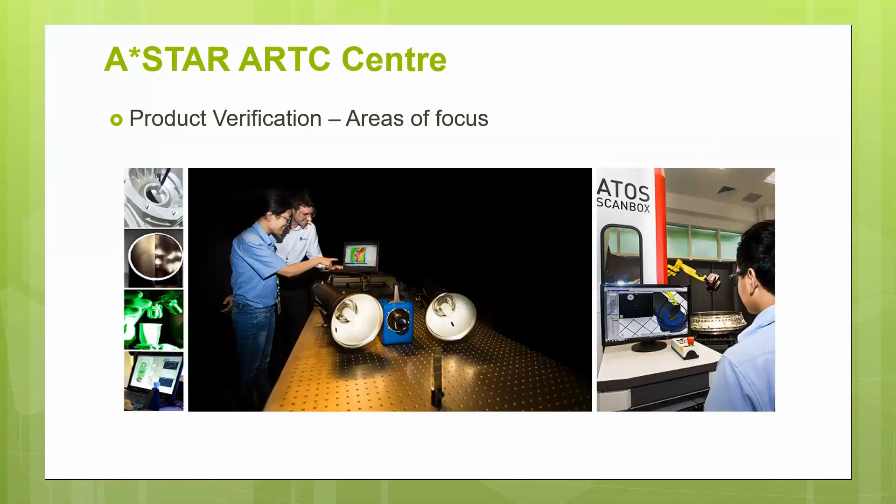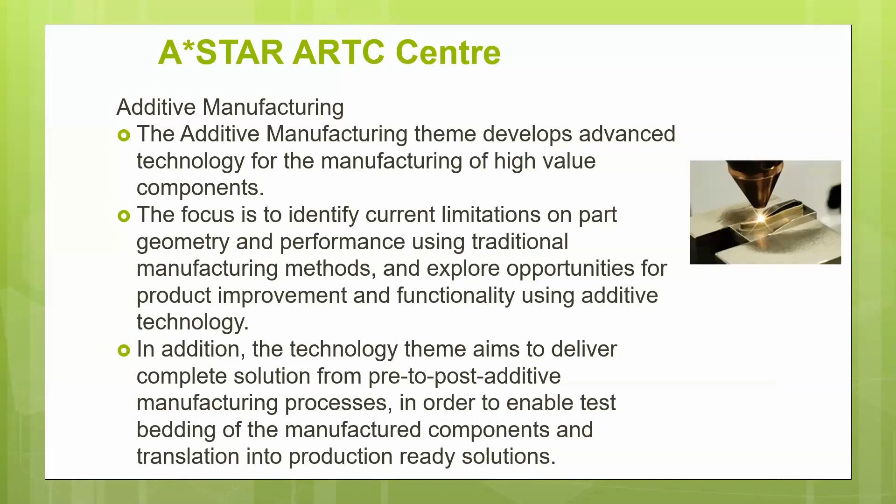Product verification, again using scanners and laser technology to measure the defects. Additive manufacturing is used quite a lot because it can be used to repair a lot of parts by doing cladding, etc. Again, on additive manufacturing, laser cladding.

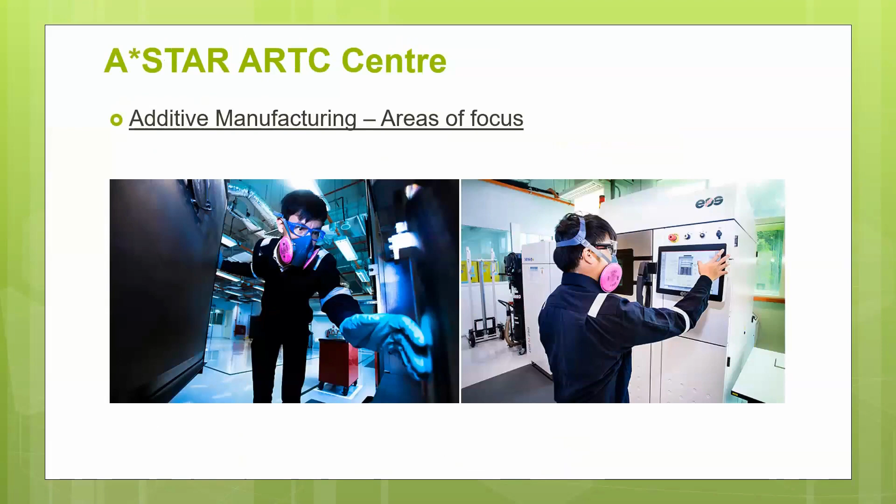Time is almost up, so we'll come to conclusion soon. Remanufacturing is necessary for sustainable development, and business models need to change for it to be successful. Mindset change means consumers will have more peace of mind, companies will profit more, and the environment will be conserved. This is summarizing the process altogether.

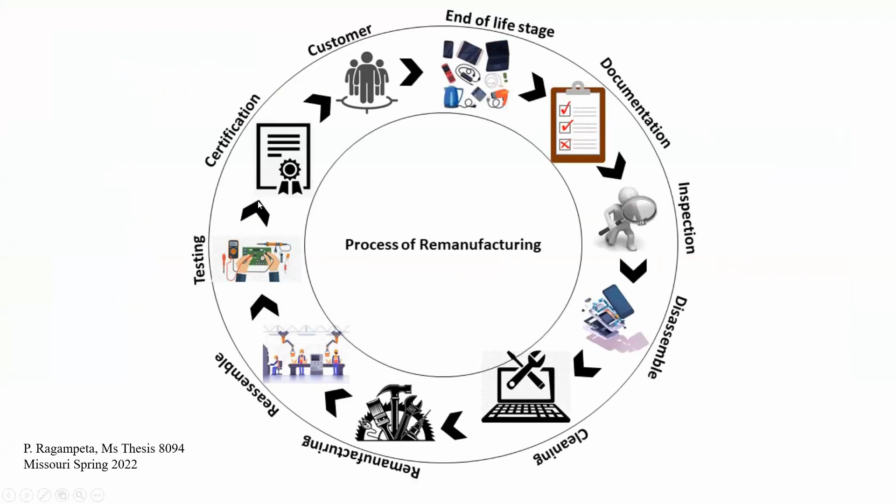Inspection, disassembly, cleaning, remanufacturing, reassembling, testing, certification, and going back. So future remanufacturing involves a lot of automation. Although in the beginning I said remanufacturing is largely a manual process, it can be automated to various extents. For example, you can use imaging, hyperspectral imaging techniques to find out where the faults are.

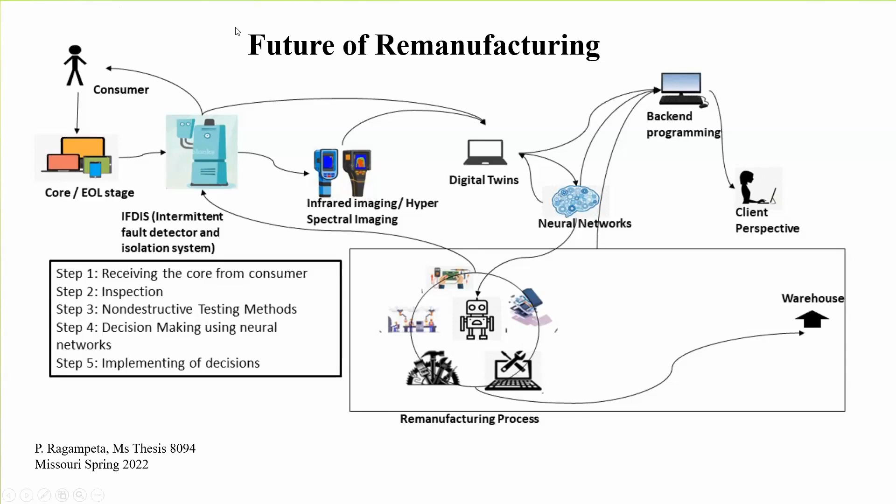A digital twin can also be used to monitor the product before and after. You can use a neural network to do optimization to find the best path for disassembly, and then you have backend programming. After the remanufacturing process, you can use automated equipment to put them together and put it into the warehouse. So in future, I think we are looking towards a remanufacturing plant, which is largely manual now, and converting it into a more automated process.

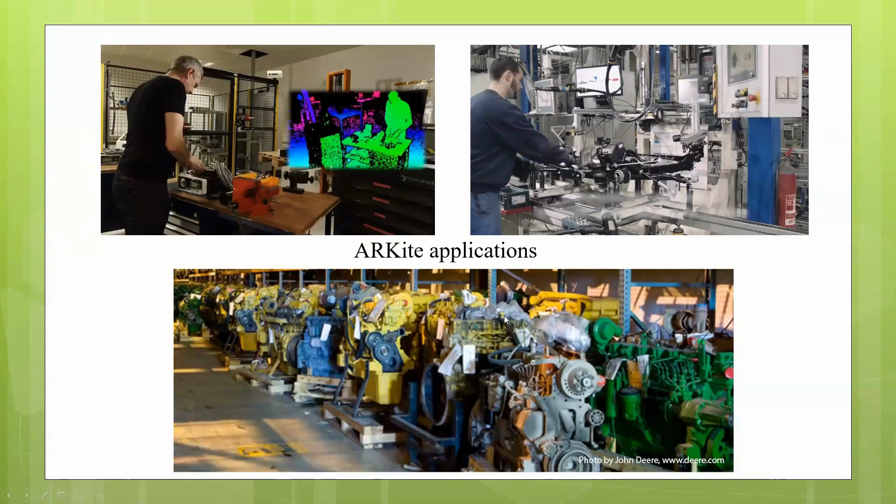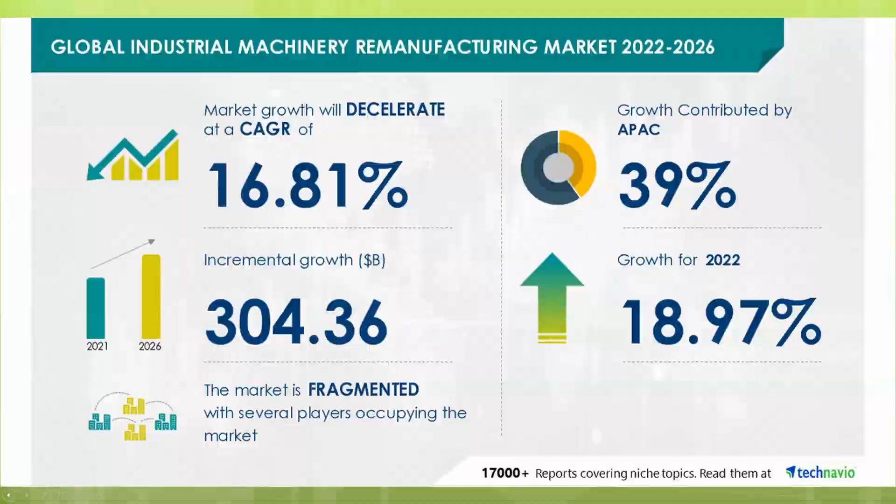Some of the global industrial figures can be seen here, showing lots of growth. So we call remanufacturing a win-win-win scenario. What is a win-win-win scenario? Consumers pay less, manufacturers earn more, and the environment receives reduced impact. So this has actually become very good.